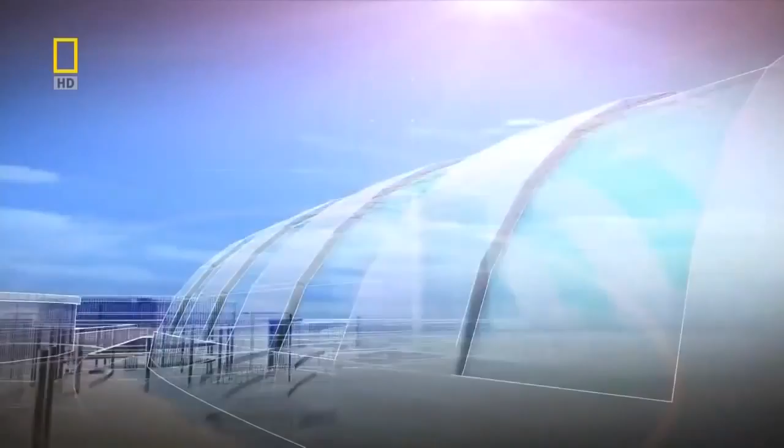The desert sun rises over the Dubai Mall, the city's shining new landmark. In 3 days, the mall will open. Everywhere you look, over 10,000 workers are frantically racing to beat the clock.

Miles of railings left to polish, acres of marble still to clean. Mannequins are waiting for their flashy threads.

The mall, sold as the best Dubai has to offer, is now in a desperate race against the sheer scale of this project's ambition.

Bob Fields, the new head contractor, is on his rounds. He has a lot of ground to cover. The site contains the area of 50 football fields. Every corner he turns, there's something that needs finishing, cleaning, tidying, and he has to sort it out himself.

Lynette, where's Omar? Hurry up, I need him right now. Well, tell them to retract it.

He's determined that the mall will open on time. It's already missed 2 deadlines. If it misses a third, well, that's down to him.

But of the 1,200 shops due to open here, only half are occupied. Some just haven't been fitted out yet, and some have yet to be leased. What looks to us pretty much like a building site, to Bob is a diamond in the rough.

Nobody goes home until 1 o'clock in the morning and everybody's back at 5. Overall, the entire community has come together to cooperate and give us the opportunity to open the mall.

It's going to be very exciting. We're going to have SWAT teams that are set up and positioned around the building. We're going to invite the public to come in. Traffic is going to be a challenge. We're anticipating some 50,000 cars every day.

The thousands who thronged the mall when it eventually opened will never know the real story of those frantic final hours. They would have come to see a mall worthy of Dubai. Opulent spaces and shops, row upon row of them.

There's a vast aquarium to wonder at, with a massive acrylic viewing panel bigger than any other in the world. There's a full-size ice rink in a city where outside temperatures can top 40 degrees.

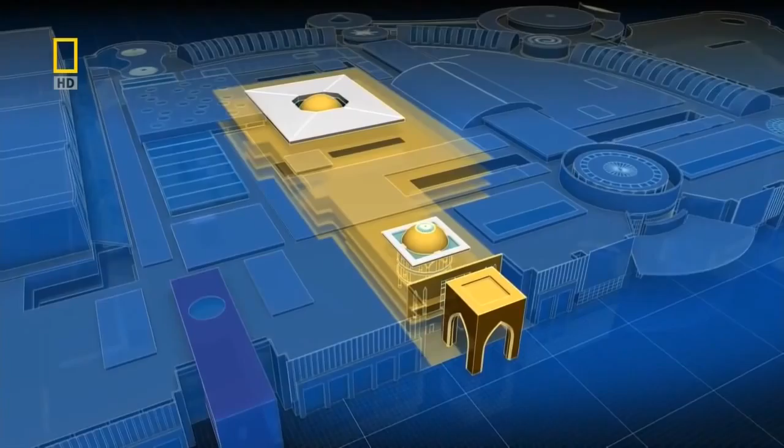The mall is so vast, it was assembled out of 37 conjoined buildings. It boasts an old-fashioned Arabian souk, a world record-beating aquarium, an ice rink, and an entertainment center complete with a roller coaster.

Stretching over 1 square kilometer, it sits on a mega floor space that beats the reigning mega mall in China and dwarfs the Mall of America hands down.

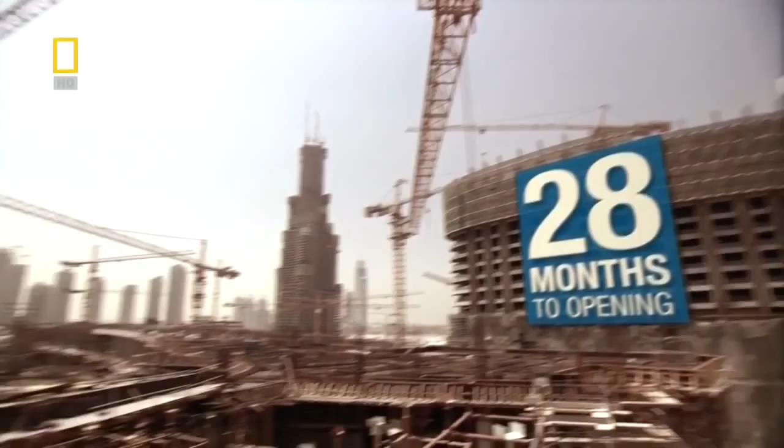Two years back, and a formerly empty stretch of sand is being turned into this retail palace. The project is badly behind schedule. Going by best laid plans, it should have opened by now.

Angeline Chan, chief architect, is on one of her regular visits to the huge spaces that she's helping to create. Future ceiling heights for the tenants. Let's go see the precast panels.

It's bigger than anything she's yet done. Probably the job of her career, with some touches she's particularly proud of.

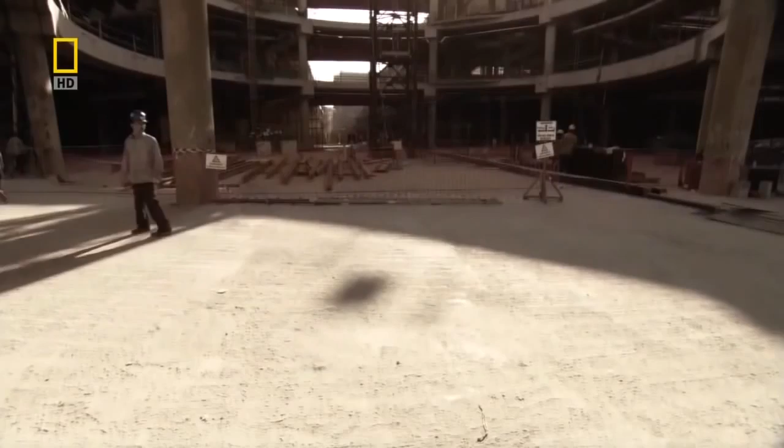I think my personal favorite spaces in the whole mall are all the atrium spaces, the 3-story high corridors. Even at this stage, when you walk around the mall, and finishes aren't even in yet, but you can feel the majestic spaces that surround you. I'm just left in complete awe.

There's no time for her to relax and enjoy the view, though. Every time she comes here, there are technical challenges to be faced. The knottiest problem: to get column-free roofs over the vast atrium in place on time.

So what's the contractor promising us now? You're probably looking at about February next year for this. The biggest challenge that we had to face is time. We're given the task of building this mall in 28 months.

Months behind the original schedule, it's not just the open halls causing problems. The whole design is throwing up challenges for the architect. The complex has been designed as 37 separate buildings.

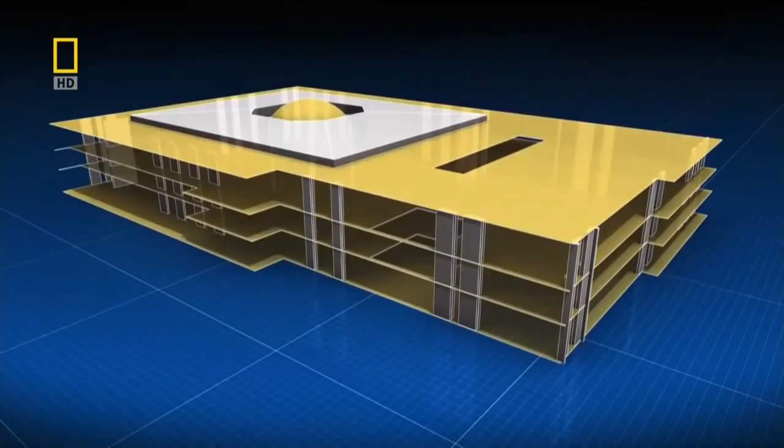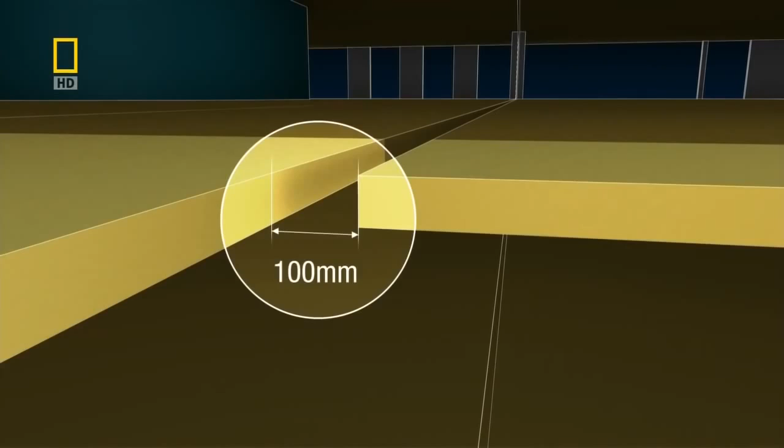Local codes say all structures must withstand earthquakes up to 5.5 on the Richter scale. So each building is reinforced by shear walls that withstand lateral force, a side-to-side motion that won't bring it down. A 100-millimeter gap between each building not only allows for expansion in the desert heat, but if one should fall in an earthquake, it won't bring down any others with it.

While Dubai does not stand in a high-risk area for earthquakes, the disaster in Bam, in nearby Iran, was felt even here. In 2003, that devastating quake left 43,000 dead, 30,000 injured. Many perished as buildings collapsed. In Dubai, no one is taking any chances.

More than anyone outside the royal family, one man is responsible for the shape of modern Dubai: the Director General of the Department of Economic Development, Mohammed bin Ali Alabbar, known universally as the Chairman. Everyone on the Dubai Mall project answers to him.

So you can give me a discount. Our rates compared to them are very reasonable. We will work together, I appreciate it. I will do all your rates, I need to open your book. Help, open book, I'll do open book with you.

Fair? Fair. Open. But the Chairman is nothing if not a hands-on boss. It means he comes up with changes to the design. Today, he's not too pleased with the fountains he's paying top dollar for.

Last week we had to decide that we're taking some walls out, some water feature that, in my view and my management's view, was obstructing the fountain views. We're putting beautiful restaurants overlooking this $100 million fountain. Can you please take the wall down and let them see the fountain?

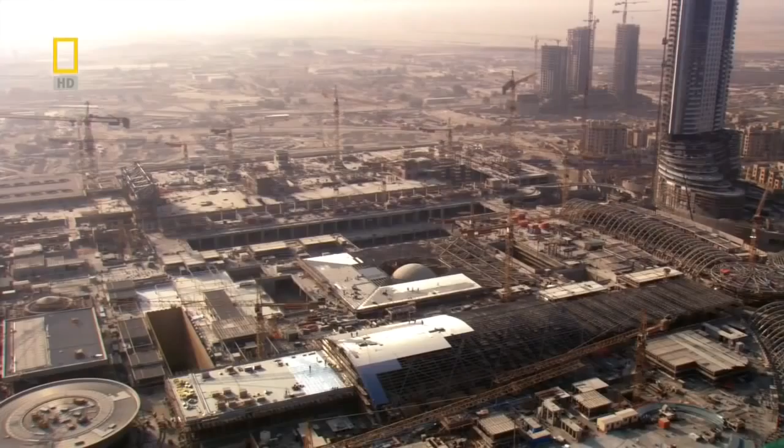Well, his involvement here is one that will reshape Dubai. Next to the mega mall, he's also set his architects challenges that include the world's tallest skyscraper. We are creating something very, very special in this area. We have the tallest building, we've got the greatest hotels. It's going to be something that people recognize us for.

So what the Chairman wants, the Chairman gets. Back at the site, Angeline has to break the news to the construction head, Jim Scobie. We've been looking at this for about 6 weeks, 2 months. So it's been 6 weeks? What we'd like to do is, if we can go ahead and redesign this quickly and get it to them. Okay, so the next time we meet...

For a minute there, it sounded like a plan. Oh, really? But there's a catch. Whatever we design, and we're probably coming up with 3 alternatives, has to be presented to the Chairman and all that. Angeline tries to make light of it: no, just do it in between the piers or something. She always finds a way to make the changes the Chairman asks for.

So it might be some sort of lightweight canopy structure, and you just hang around here, you sip coffee, you listen to the water, this nice sound, and then birds chirping. Today is a good day. Everyone politely goes along on this pretty much impossible task. People haven't done anything this size this quickly before.

And if this wasn't enough, there's a sandstorm approaching.

It's tough work in the raging heat of the unforgiving sun. Temperatures in the desert emirate can hit over 40 degrees in summer. Heat exhaustion is an ever-present danger, especially for a foreign workforce acclimatizing to the local weather and the demanding schedule.

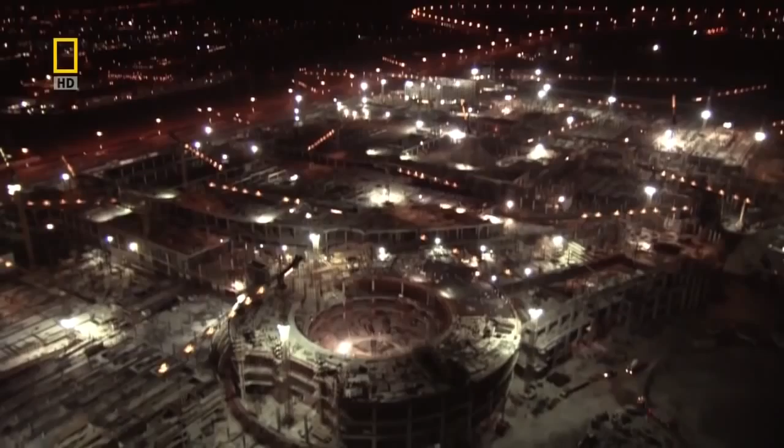Currently, work on site doesn't stop at all. It's 24/7, 24 hours a day, 7 days a week, during summer, during winter. People say the difficult we do quickly, the impossible takes us a little longer. And that's what we have to deal with here, until you say the chairman's coming, and then they say, oh, we'll get it done.

The chairman, Mohammed bin Ali Alabbar, is responsible for some of the shiniest new buildings in Dubai. Today, he's coming to the mall for a viewing. He likes to be hands-on.

For them, please, again, I need someone to trim these palm trees around the square. Still, dead leaves are hanging. Yeah? Okay.

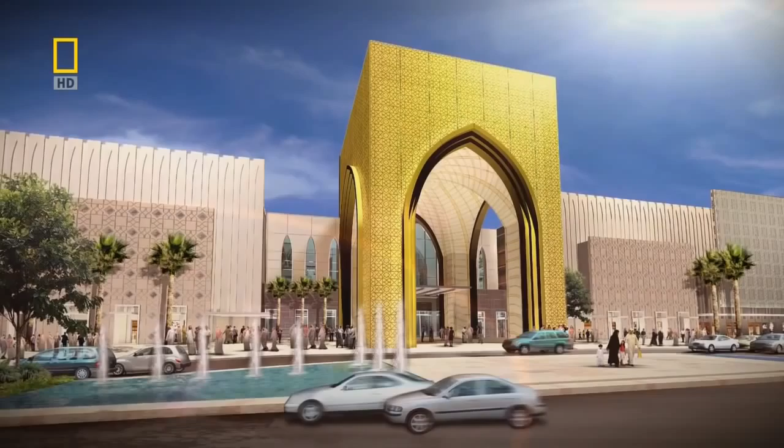And I'm very bad, I pick bad things easily with my eyes. On another trip, he noticed the colored panels on the facade of the gold souk were not to his liking. I think it was maybe a little too dark, so I said these shades are not matching from the main road. I said it will reflect badly on us. I think they had to take the panel down and probably replace it.

Once it's completed, the mall will open onto a boulevard on the scale of Paris's Champs-Élysées.

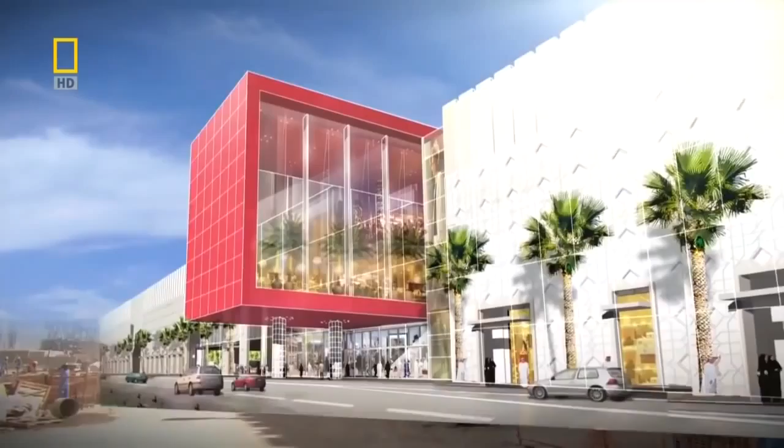Now the chairman wants to see how the grand entrance to the mall is progressing. He wants to be sure it'll make the right impression. Obviously, his arrival is treated as a bit of an event, and he's ushered to the high atrium just inside the main entrance. It's going to be a highlight.

I believe them about the maintenance issues and all the rest, but when we check and they're ceramic, they're going to be very, very nice. He listens knowledgeably to the explanations of the decisions being made. The boss tries his best to be enthusiastic.

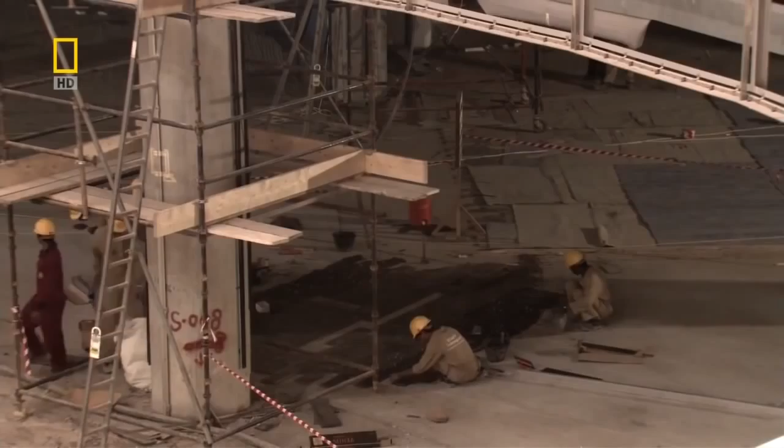Then he zeroes in on the details. All your columns are finished one color, huh? One cladding. Okay. Thankfully, he doesn't notice anything he absolutely has to change. I think a little bigger would have been also okay.

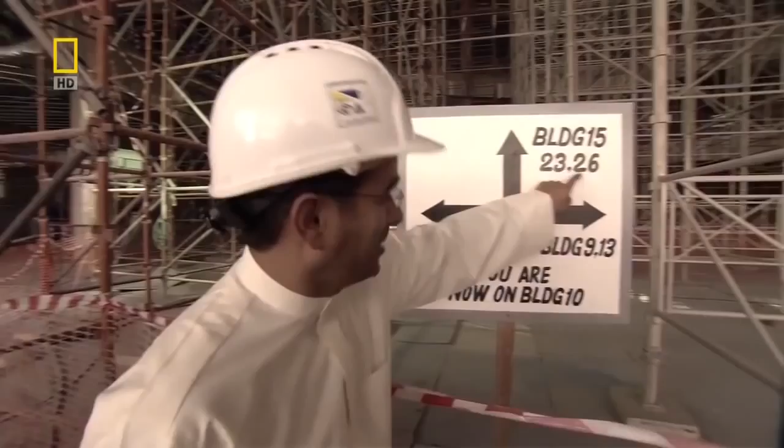Building 11, 12, we are at building 10, building 15, 23, 26. This is just amazing, as one building.

Well, I just want to go and shake every small guy's hand who put it together brick by brick, who put in the granite floors. I feel like I want to do the opening so quick, and the opening should be for them. Thank you, guys.

In another part of the mall, the little guys are frantically rushing for opening day.

One of the most important attractions at the mall will be the aquarium. Once done, it's designed to impress. That means it's going to have to be big. It will hold 10 million liters of water, equivalent to 4 Olympic-sized pools, and acrylic panels 750 millimeters thick will hold back the enormous pressure of the water. By heating and cooling the panels, the joints will disappear, creating a single panel so big it'll make the Guinness Book of World Records.

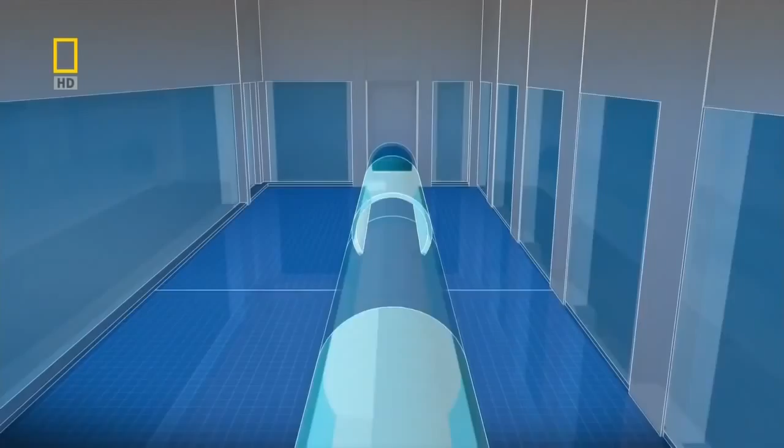The centerpiece of the aquarium will be a transparent tunnel 48 meters long. Sitting at the tank floor, 10 meters down, it will be subject to immense pressures. Iron rings help to keep its shape. It has used up the entire supply of acrylic from 2 factories for a year. It's had to be precision manufactured in 4 massive pieces, and each giant piece weighs 32 tons and is extremely fragile. So moving them requires care.

A single wooden rolling jack is called in. The plan is to hoist the tunnel in, roll it along, and place it in position. Sounds deceptively simple.

The aquarium is the one that we're all nervous about. If something goes wrong, the lead time to fix it means going back to the manufacturers. They're in different countries and they're many months away from reproducing and reissuing. See the play gap inside in the wheel.

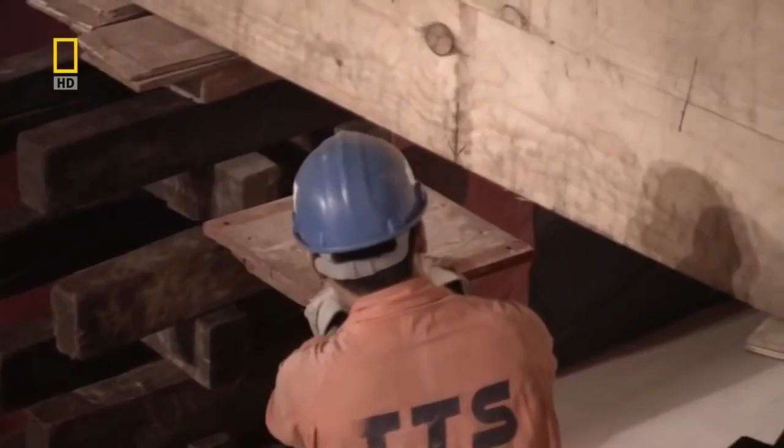It's all done under the watchful eye of manager Peter Knapp. It's the first time anyone here has attempted anything like this. Everything is done in slow motion. Even with something as large as this, there's little margin for error. The skilled workers build up the supports to level the jack before it inches up to take the weight of the tunnel.

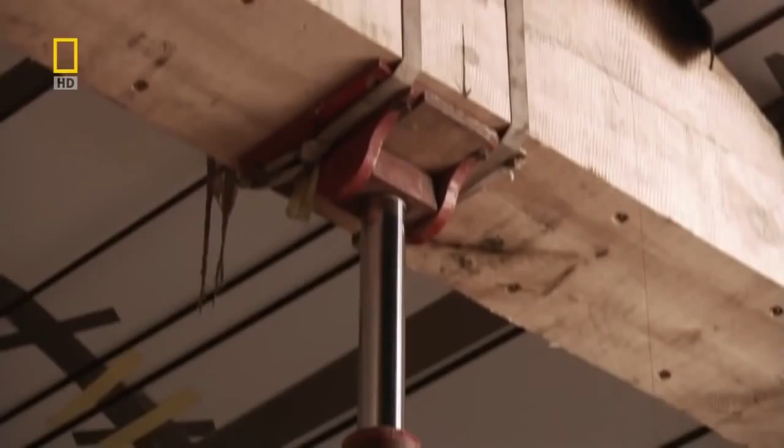The tunnel lifts into the air all right, but soon the crew spots something: the tunnel is distorting under its own weight. The pressure has forced the sides to curve inward. If they set it down now, it will shatter.

My worst nightmare is if it were to fall and it breaks.

They're built in the States. They have a fabrication time of a number of months, and it takes a number of weeks to get here. Because we have to bring the tunnel back in, there are things outside that cannot be done until the tunnel section is here. So the entire project, or part of it, is going to be delayed for half a year to a year.

Dubai's not shy about flaunting its extravagant projects, such as the world's biggest man-made island, the Palm Development, home to many of the world's rich and famous, and some of the highest property prices. Oil money has been pumped into the famous Burj Hotel. Now the mega mall is rushing to join a Dubai being rebuilt for a day when the oil money runs out.

And as always, no innovative job is without risk of delay, even if it's from a simple sandstorm, which cuts down work to the bare minimum.

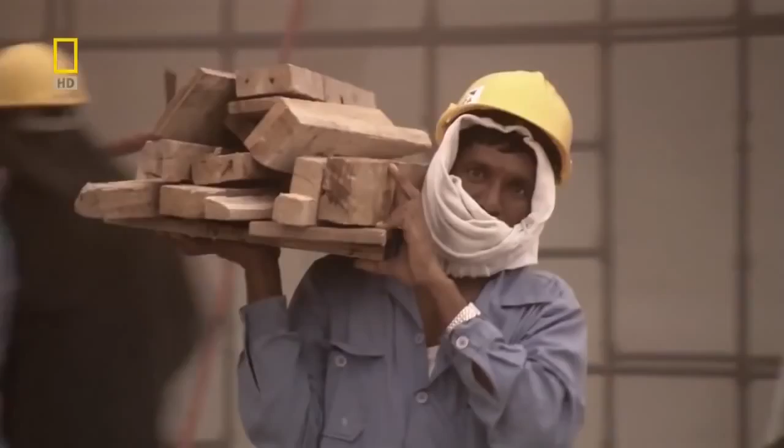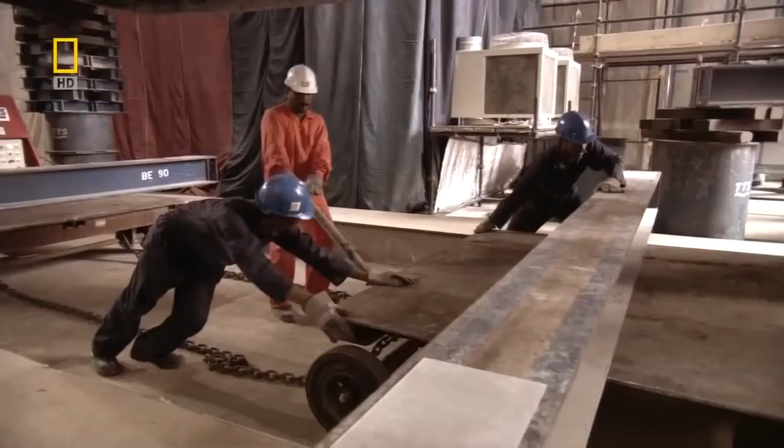The next day, after a night of head scratching, they've come up with a new idea to move the aquarium tunnel into place. In theory, the plan should work. The measurements add up, so they spread the load, and the tunnel is now balanced across 2 separate jacks.

The supports come down piece by piece, and slowly the tunnel inches downwards. But just when they think the plan is working, the crew notice that the jacks are out of sync, and their load is coming down at an angle.

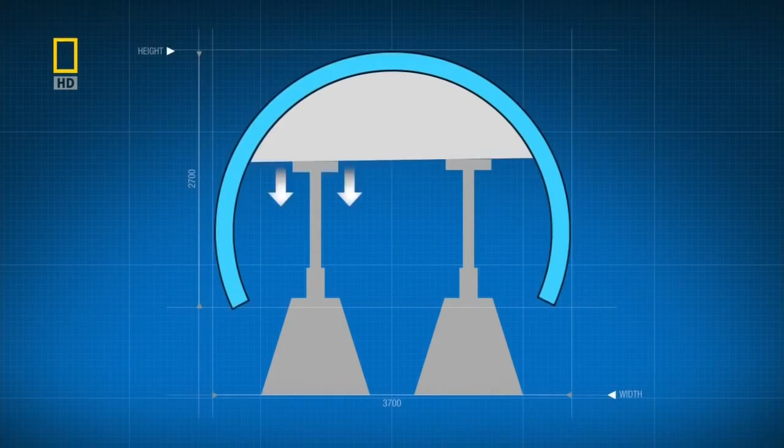The pressure of 32 tons of acrylic is concentrated onto one corner. If they try to set it down, the edge will snap off. It's not an easy job.

There is stress because if something goes wrong, there are consequences, so that does put quite a bit of stress on you.

Peter keeps at work, adjusting with his control units, balancing the two jacks carefully, keeping the tunnel straight. After 8 hours, he thinks he's got it right, but no one knows for sure until the tunnel hits bottom.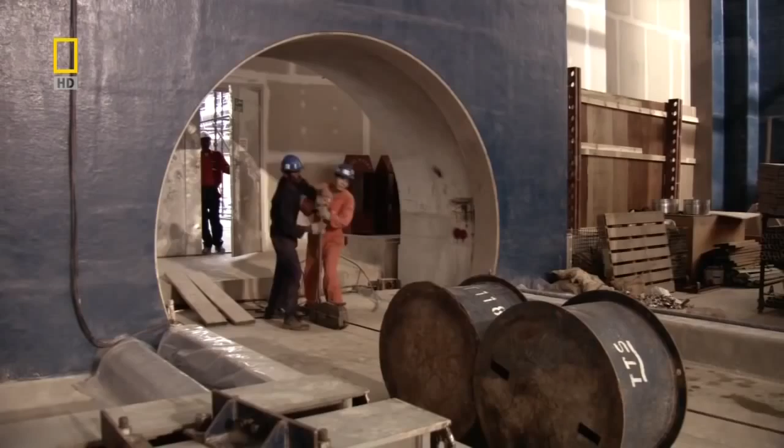All that remains is to haul it into place with a rather simple lever and pulley system. Only another 3 pieces to go. When they're all in place, they will be welded together, made watertight, and covered with 10 million liters of water.

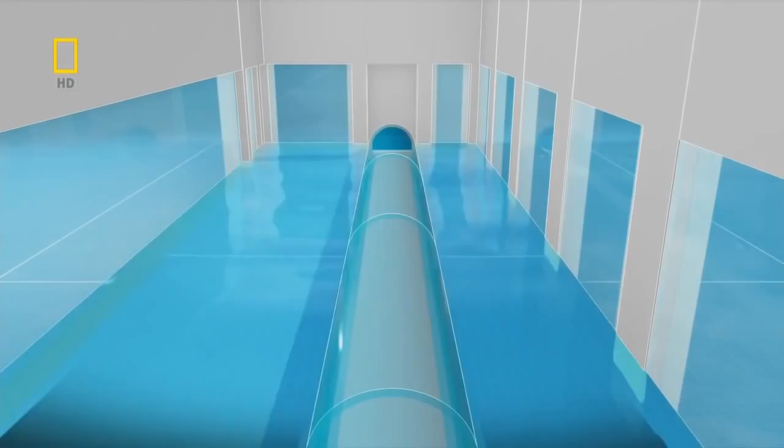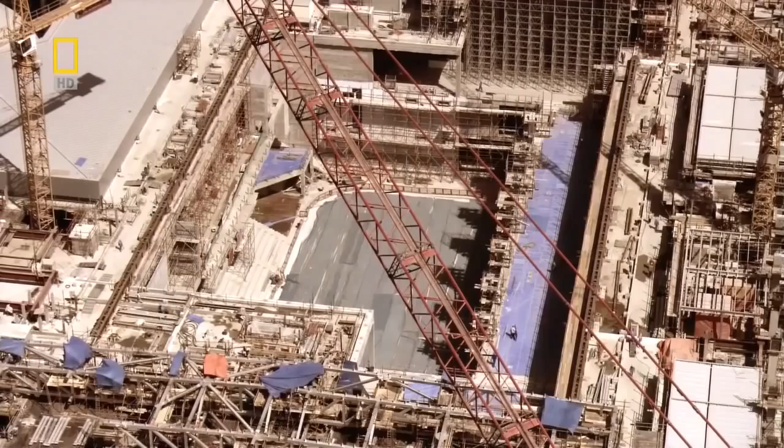While the aquarium is taking shape, architect Angeline is focusing on another of the chairman's ideas, an Olympic-sized ice rink. Layers of concrete are going down and being smoothed off. Even at this level, below the surface, bumps will mean uneven ice.

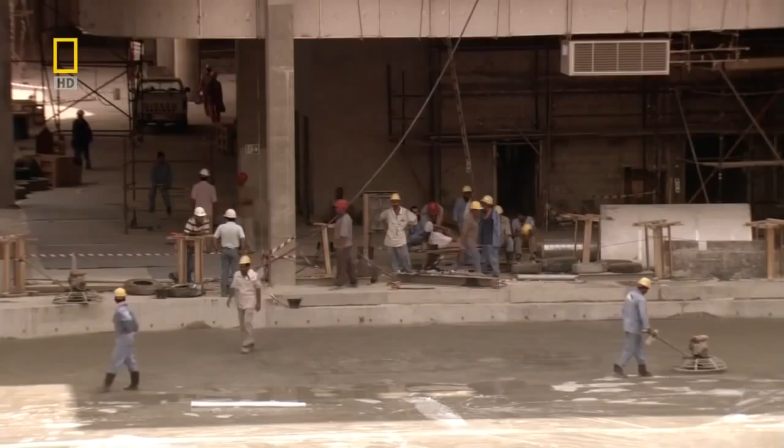Angeline has come back to talk the roof through. The rink can accommodate 400 skaters at a time. So the roof is going to be massive, and they plan to use natural light, creating a Swiss cheese structure with the desert sun beating down through 60 skylights onto the ice below.

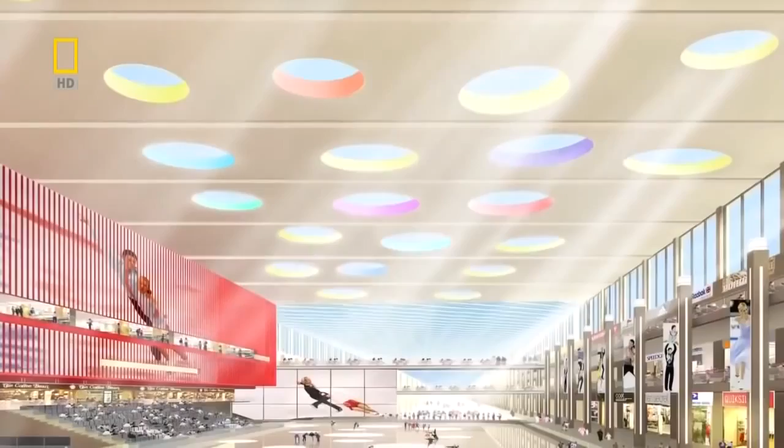About the impact of the sun, the studies will be coming back in a couple of weeks' time. I think the worst case scenario is that we may have to introduce film to take maybe 5 to 10% of the direct sunlight off. The sheer heat could be a problem for the ice.

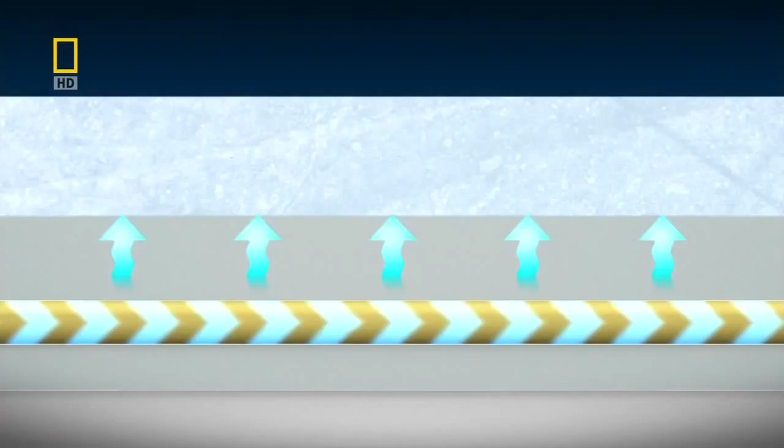An ice rink is rather like an ordinary fridge. Pipes are laid through the concrete, and cold glycol will be pumped through them from refrigeration units. This will freeze the concrete, and then the ice will be built up on top of it, layer by layer. But having skylights above means the ice must be kept 2 degrees colder than a rink in a temperate climate.

Everything on this site is geared to breaking records. You need cranes to shift all this big stuff around. In fact, there's been so much construction in Dubai that it's said up to a quarter of all the world's stock of cranes can be found here.

The biggest at the site is the Demag 2800. There are just 50 of these 600-ton monsters in the world, and they're only called in for jobs that no other crane can take on.

Somebody's hurrying, they want the job done quickly, but the machine cannot move like this. We need to be patient with this heavy crane.

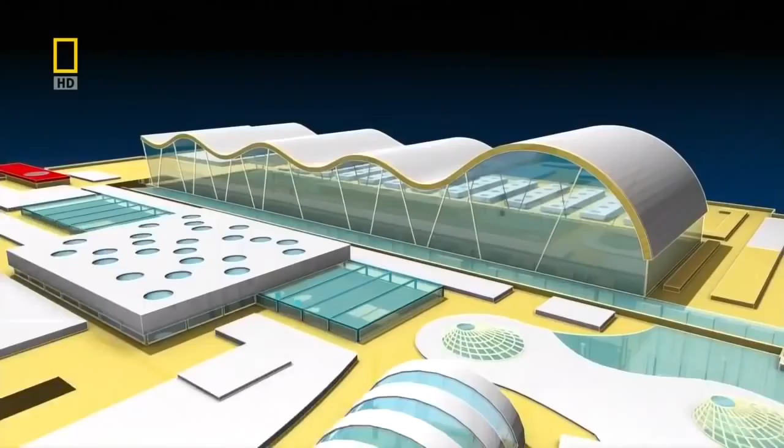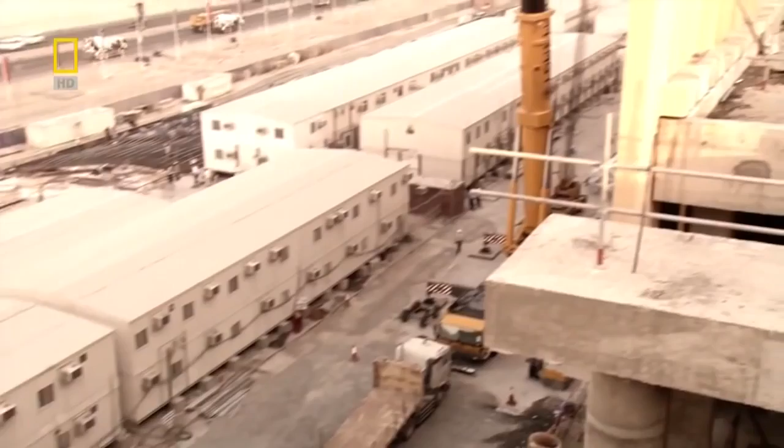George and his Demag have been called in today to start lifting the pieces for the roof of the entertainment complex. Each load has to be lifted one by one, a job which requires all the patience and experience George has gained in his 26 years with his crane.

Some people are angry, some people shouting. That's when we want to keep silent like that.

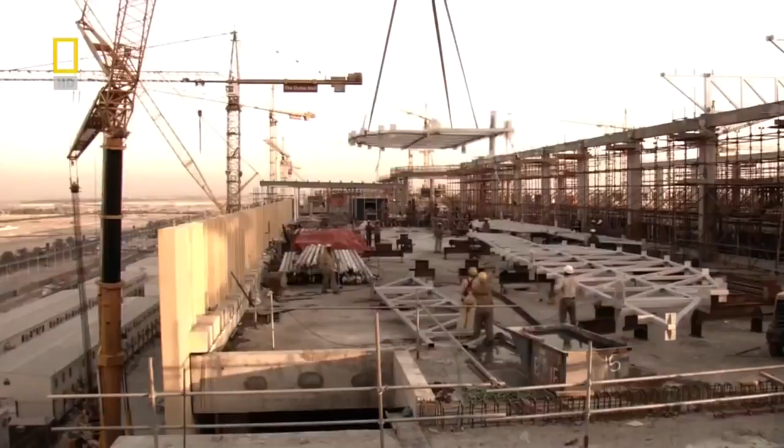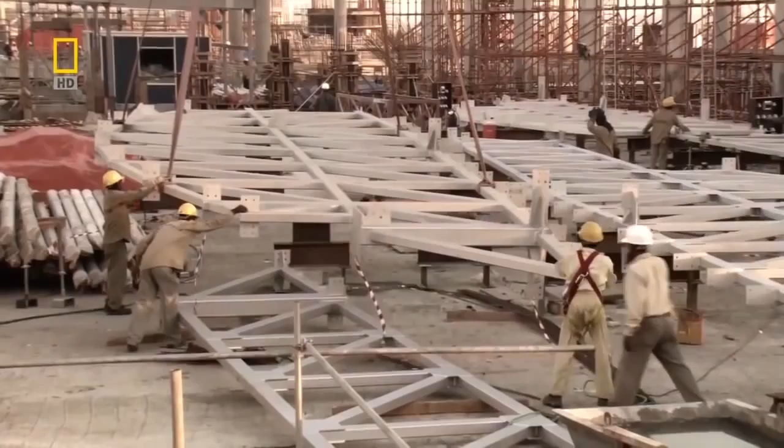The roof of the entertainment center will be put together like a giant jigsaw puzzle. Supporting a huge span with no columns below is difficult enough, but this roof has thousands of pipes, beams, nuts and bolts, because in Dubai, they not only like things big, they like them complicated.

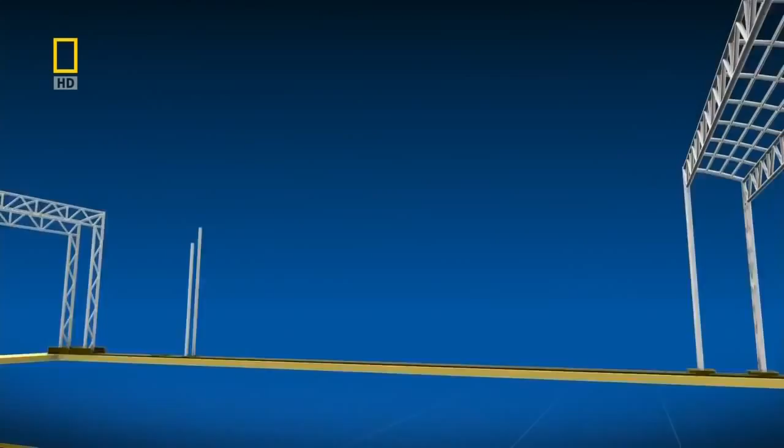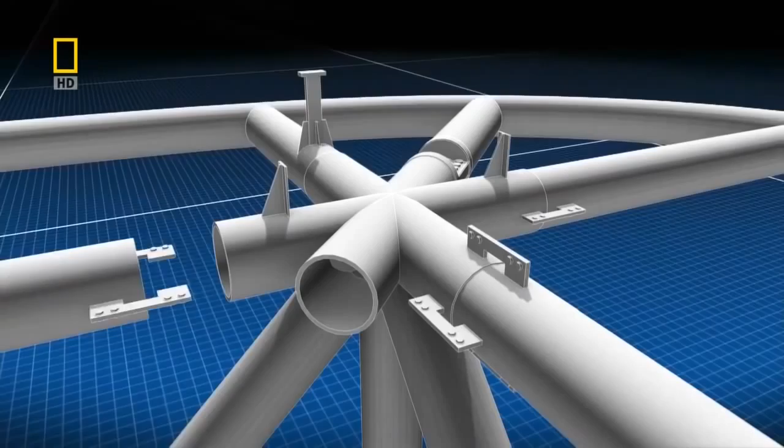The easier way would be to build a simple flat roof, but this will have an undulating design, which means that not only do the trusses and joints have to be rock solid, but they're amazingly complex. Each piece has to be designed and manufactured individually. Of course, the design was a special request from the chairman.

Well, I think you should have a little bit of taste, so now we want to do something better, we want to do something creative.

The entertainment roof is just one of 69 roofs that will come down over the mall. It was one of the most complex roof structures that we've ever done, with the many skylights that we've designed, each different from the other. We were setting ourselves this huge task.

One factory in Dubai has upped the number of machines, ramped up its manpower, and has been working round the clock for the last 4 months to get the roof parts made.

Once the intricate computer designs arrive, the work begins. It requires a surprisingly fine touch. The hand of the operator guides the computer designs. Every hole, every cut, every weld has to be millimeter exact.

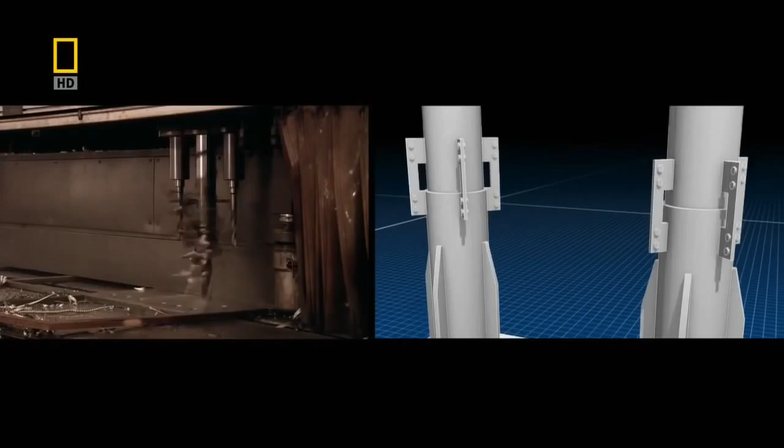Any mistake, and the pieces won't connect on site, and the roof can't go up.

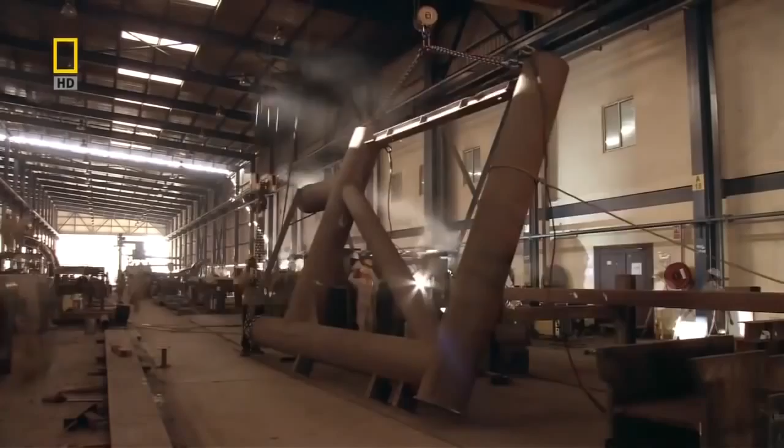By now, the factory should have delivered all 14 support pairs, but the schedule was over-optimistic, and only 5 have actually been delivered. Extra jigs have been fitted to speed up the work, though no one knows how soon all the trusses will be ready.

Back on site, the trusses are delivered, and despite all the efforts of the engineers, they are proving hard to fit.

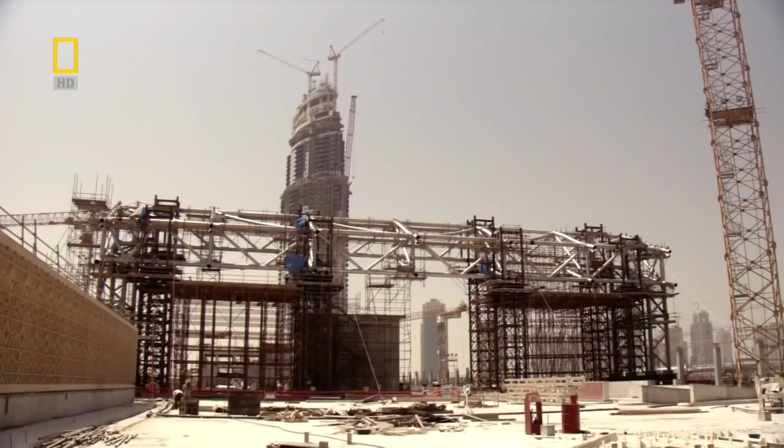And the structural engineer that designed it is saying it has to be dead on, we can't move anything. And the construction engineer is shrugging his shoulders at me saying, I can't build it. Many months after Dubai promised the world its largest mall, the roof has yet to go up.

For centuries, Dubai has been a trading post. The Arabs have long been seafarers, and Dubai was a prime stopping-off port on the route from India. Wander the streets, and you find many traditional shops and markets, the souks of Arabia. One of the most famous of these is the gold souk, where locals and foreigners alike go to buy, what else? Gold. Browse the stalls here, and you might even find a bargain.

The plan is to include an echo of the gold souk in the brand new 1 kilometer squared Dubai Mall. The souk is intended to be a jewel in the mall's crown, and no expenses have been spared to give it a touch of Dubai, right down to the temptations on display.

We have a piece, an iPod, pure gold, 18 karat, and it's with 5 carat diamonds. We're talking approximately this one for like $35,000.

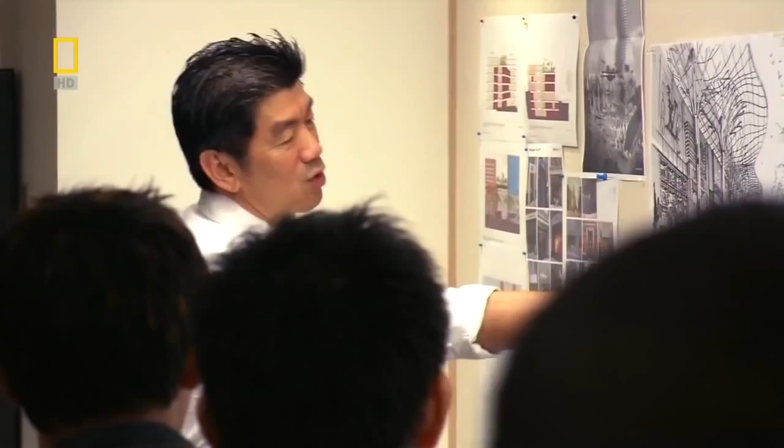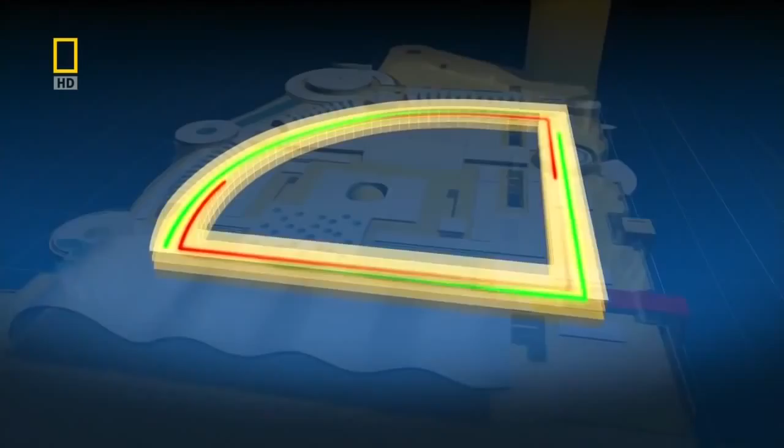Dubai Mall is basically like a huge quadrant, so that's the circulation area that you move around. The loop keeps shoppers moving through the mall. With no side alleys and narrow passageways, people won't get lost and can spend their time spending money. And all shops get prime locations, meaning rents can be high.

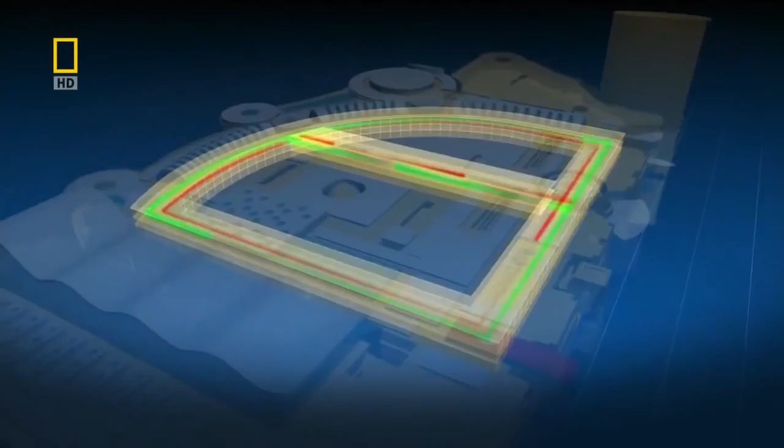For the less intrepid shopper, the architects also designed a shortcut through the loop. This leads past the aquarium, a landmark to help shoppers keep their bearings.

Simple signposting is enough to guide the shoppers from one atrium to another, and there's always something to look at. At off-peak times, these huge spaces could seem very empty, so every atrium is filled with things to look at, to keep them all feeling busy.

To tempt people to stick around, the prime way of doing this is strategic positioning of food and beverages, places to eat and drink for you and me. You try and put them where you can have nice views, or where you can actually spill out into the open areas.

Outside the mall, when the desert heat is less intense at night or during winter, the chairman's multi-million-dollar fountains have been designed to keep the diners lingering and tempting them to come back.

During construction, the team of architects set its shoulder to the wheel, but even they couldn't keep the project from missing its deadline.

Months past the mall's original date for opening, and the roofs are still only going onto the individual buildings, each one different and bringing its own headaches with it.

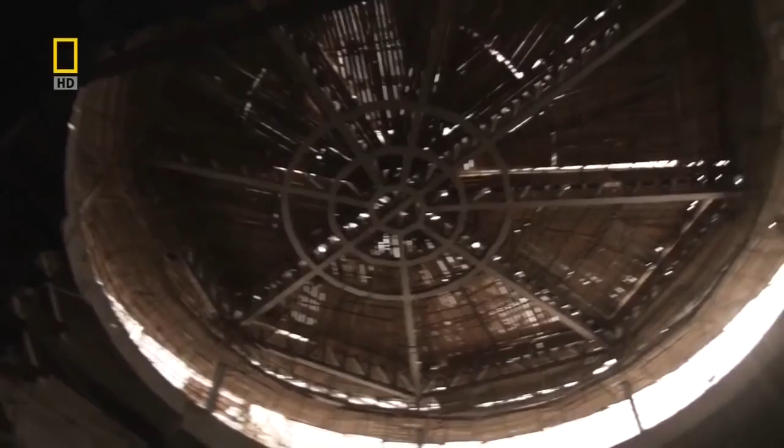The aquarium's viewing panels have been boarded up and sealed. Inside, chemical bonding with regulated heating and then cooling of the acrylic causes the joints to fade away. And the aquarium tunnel, too, is finally in place.

In the meantime, the lead contractor has changed. Bob Fields is now in charge, bright-eyed and bushy-tailed.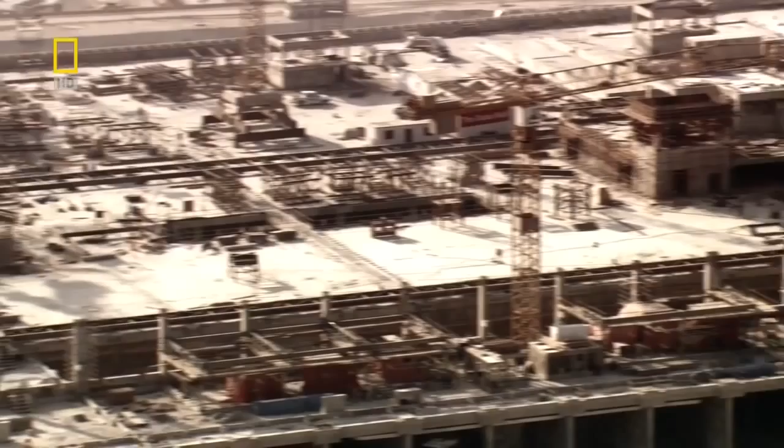But soon enough, he misses this deadline, too. He's encountering problems - the trusses for the roof of the entertainment area have still been arriving late and imperfect.

Now, these things are actually assembled in the shop, fully built, and then taken apart and brought out here. But between taking them apart and shipping them and everything else, we end up with some very minor deficiencies. We're talking - yesterday we were talking 3 millimeters, 5 millimeters, 8 millimeters - between the way that the pieces are lining up.

And the structural engineer that designed it is saying it has to be dead on, we can't move anything. And the construction engineer is shrugging his shoulders at me saying, I can't build it. So I think we found a compromise, and I think it's going to work.

Bob's found his chief task is damage control. If a guy has an issue, he needs to come, because that's where the rubber hits the road.

And that can mean banging heads together. You guys are all grown-up professionals. You know exactly what we're talking about here. All this little conversation is for the third time.

Through threats and persuasion, the mall slowly gets completed. Bob's team has come up with ingenious ways to meet the deadline. They have set up a workshop within the site to make the fiberglass facade that'll cover the mall, so supplies are always at hand.

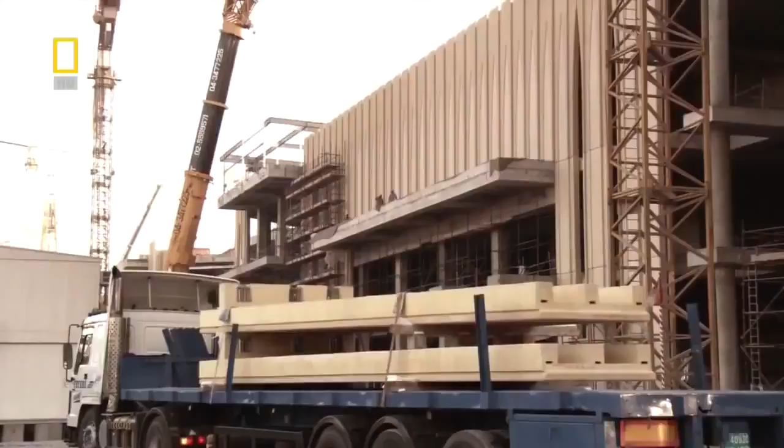But even as the finishing comes up, new complications set in. Everybody has to be very careful while moving it. We don't want any damage to this, because once you damage it, we're going to have to rip it down.

You hear what he's just saying? A lot of times a guy will come into a meeting and represent that everything's a problem, all the floors can't go in, all the ceilings can't go in. By the time you settle him down and nail him down, you find out there's 2 or 3 issues. The goal I set for finishing in June is absolutely obtainable, and we will obtain it. The difference between an optimist and a pessimist, or somebody that's negative, is whether they understand what the work is.

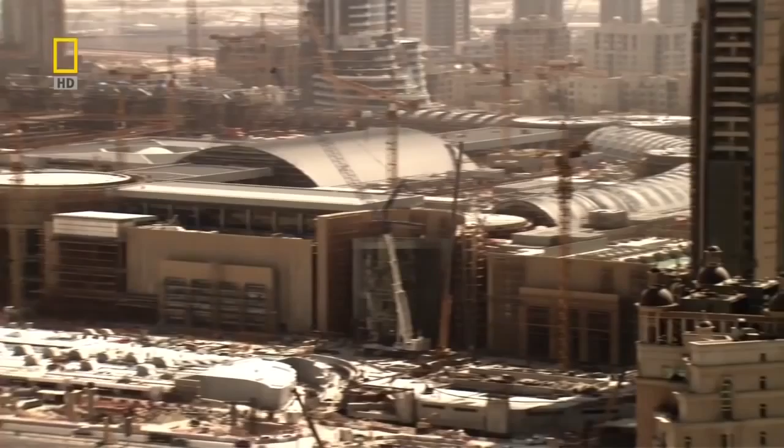So after months and months of war rooms, the facade goes up, the roofs come down, the mall slowly gets ready. 170 escalators in the building, for the 30 million expected to descend on its stores in the first year alone. Acres of marble and glass begin to dress the bare concrete. The souk is given its expensive finishing touches.

Finally, the mall can look forward to some kind of opening. It's been an epic struggle, but with one last effort, the biggest mall in the world should be able to fling open its doors in just 3 days.

You know, the world's watching, and they're having that expectation and they're coming to visit the mall. Our challenge will be opening the mall, welcoming people, serving them, cleaning the mall, maintaining the mall, looking after the retailers, looking at safety, looking at security.

You know, I worry all the time. And maybe worrying all the time, well, that's why I don't gain weight. I worry all the time.

And he has plenty to worry about. With the press invited to an opening just 3 days away, few, if any, of the shops seem fit to open to the public, and 600, half, are expected to. Even the gold souk, the mall's pride and joy, seems a long way from being ready. But the gold-colored panels the chairman wanted changed have been done, even if the boulevard isn't quite looking like the Champs-Élysées yet. But in any crisis, there's always the optimist.

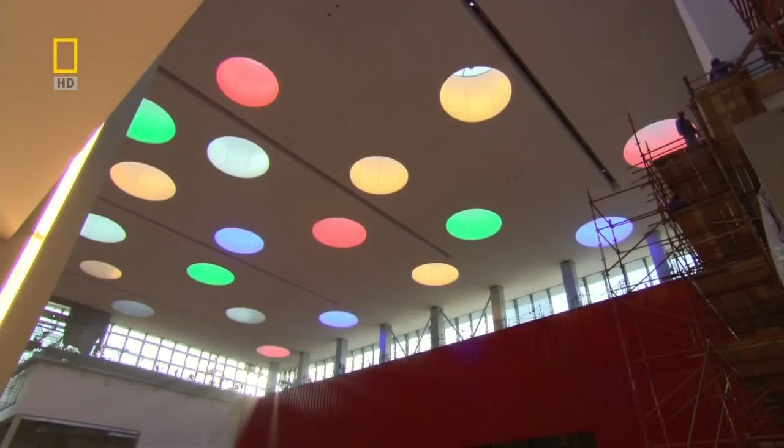At the ice rink, the Swiss cheese skylights have come in. But the final layer of ice is still being slowly, painstakingly frozen.

Thankfully, the aquarium is ready, and it's feeding time for the 32 sand tiger sharks. Lunch is usually slices of mackerel and milkfish. Expensive tuna is on the menu as the occasional special treat. The sharks only consume about 15 kilograms of food daily, a tenth of all the food the kitchen prepares every day. Unless they get regular meals, the sharks could wreak havoc in their enclosed environment.

We have the largest stock of sharks anywhere in the world. In the sea, they would take every opportunity to feed that would pass them by. With a routine like feeding at the same time each day, having a food type that's specific to them, and definitely our behaviors can condition the sharks to realize that food will come every single day.

Every shark, every ray has been implanted with microchips, and they're all monitored here for their growth from the time they arrive at the tank, their health, their fertility. They need to be monitored if they are pregnant. But one thing Paul need not worry about is the sharks snacking between meals. They would much prefer to wait for the divers to deliver food than to invest energy in hunting. So eventually, within a month, it starts to settle down and the sharks really pay no attention to the fish swimming past them.

The area we're in now is the life support system for the main tank of the aquarium. This is the heart of the aquarium, where all the water is processed, cleaned, and conditioned before reintroduction back with the animals.

The system monitors the oxygen content of the water, its acidity, the air and water pumps, the filters—everything is automated, and there are fail-safes built in. Nothing is left to chance when it comes to the fish's welfare.

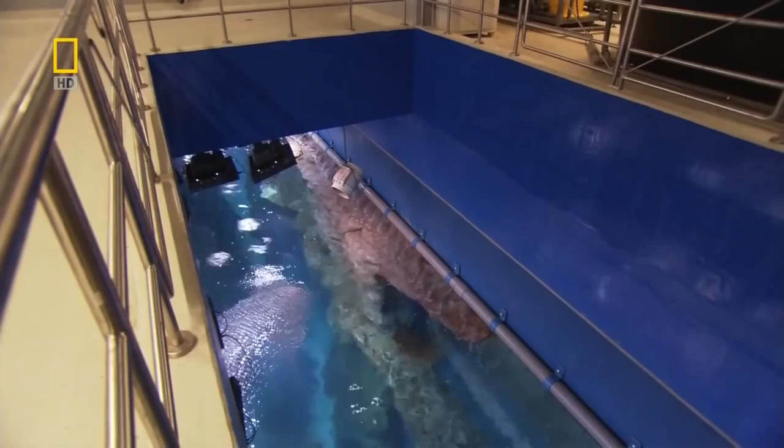So if, let's say, a pump was to fail down in the basement, and that pump was responsible for sending new seawater to the aquarium to top it up when we lose seawater through our foam fractionators, then if that pump fails, it will send me an SMS alert in case I'm outside my office, and it'll also send an alert to this office.

With everything running smoothly, the aquarium looks set to be the highlight of the mall opening. When you go and look at it, it really touches my heart. And then straight away I say, oh my God, I can see the kids. I want to see the kids running around this thing.

Against the odds, the ice rink has come together. The ice has formed, so much so they can even get the Zamboni out, smoothing off the surface, ready for the first skaters.

And so it's finally the night before the opening. Twelve hours and still a million things to do. One more night passes in Dubai, the city on the Gulf that never sleeps.

Then the day itself dawns, the day of the opening. Inside the mall, the aquarium is getting a Guinness Award for the largest viewing panel. The chairman had no plans to attend, and there was only a handful of press present at the aquarium.

Late in the night before, the decision had been taken not to open to the public. It was not opening because it was not ready. We felt that it wasn't ready to receive such a big crowd—it would not have been able to cope.

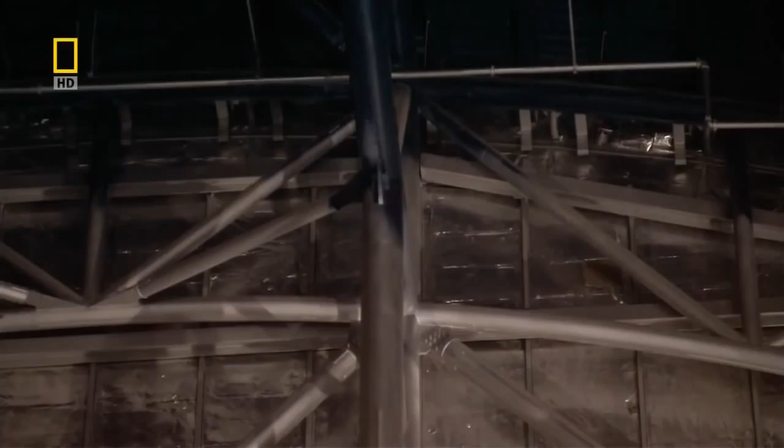The undulating roof has finally been fitted onto the entertainment center with all its joints and trusses, though whether it's strictly accurate to say the delay is just one year is also open to question. The actual entertainments inside are far from finished.

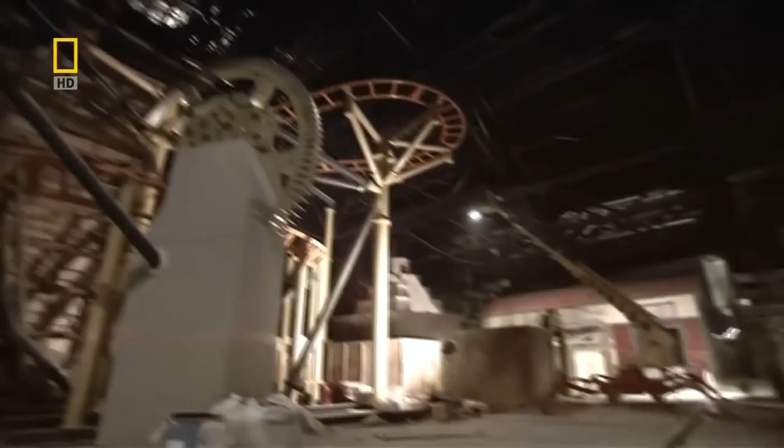Mock streets look down onto yet another construction site, though the track for the roller coaster is at least in place. It's going to take some while yet to fill this space and open it to the public. Frankly, with the many changes, it's a wonder it's got even this far.

The mall is open, it's functioning, and people are visiting. Opening any mall this size is a gamble, but one done in true Dubai style—it may yet pay off.